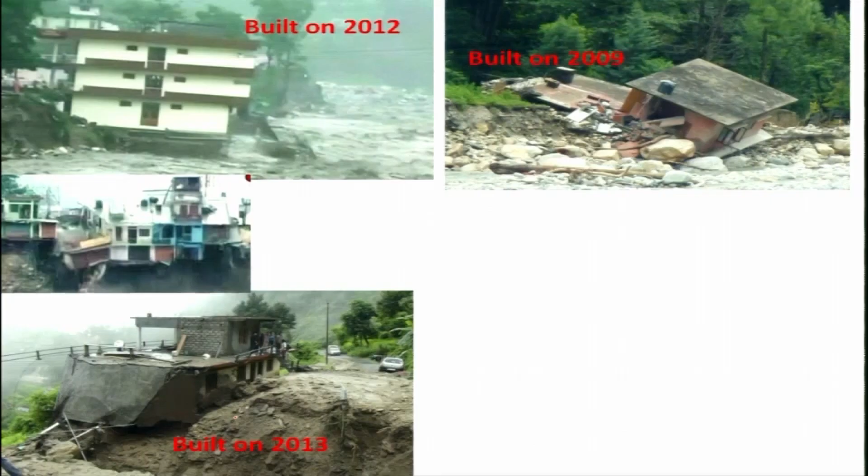This is quite an old temple, and let me tell you that it has survived over the years, and in recent time there was a flash flood in 2013. If you look at the buildings which were built around this Kedarnath town, this building was built around 2012. This building which was spoiled by the flash flood was built in 2009, this building damaged during the flash flood was built in 2013 itself, and this building was built in 2012.

Now the question arises, what happened to the Kedarnath temple, which was built around 1200 years back according to history? That was a very gigantic flash flood, which destroyed all these buildings. But what happened to the temple? Before the disaster, this is the temple, right? And these are the buildings which were built very recently.

This is before the disaster. After the disaster, only the temple remains, and most of the buildings are destroyed. Nothing really happened to this temple, although the temple was closed for a year to check whether anything had happened to its foundation. Both IIT Madras and the Archaeological Survey of India found that nothing had happened to the temple, whereas the buildings constructed using modern technology were washed away.

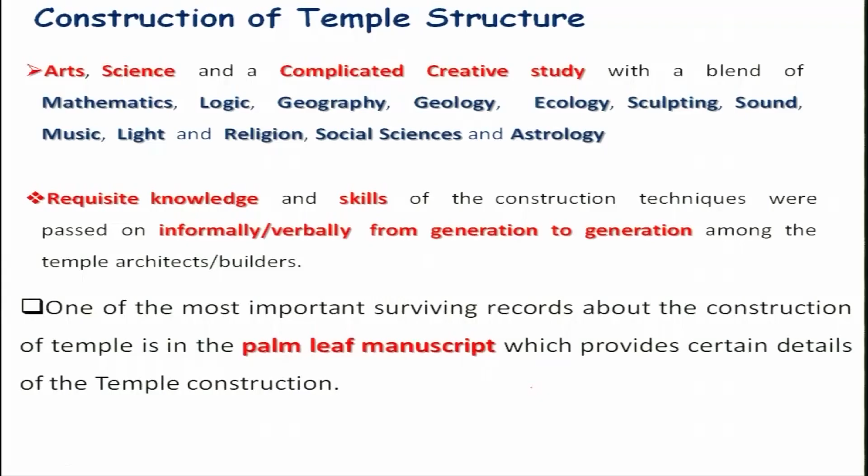However, there is evidence of the temple drawings and some calculations, which I will show you briefly. You can find evidence in certain details about the temple construction. Let us look at this palm leaf, which shows some calculations in the language of that time.

And if you look at the way we do drawing today, like elevation, plan view, and side view, it was there at that time, but unfortunately that is not being taught to our people, even in engineering. This record, which I could get from the work of Michell, who published a book in 1988, shows the list of workmen, their salaries, rules of conduct, and provides an account of several years of various temple building operations.

Of course, this leaflet was obtained from the 17th century; the 12th century documents could not be traced, because of so many years of being dependent and ruled by foreigners. A lot of things were destroyed. And this is a palm leaf inscription from a manuscript showing architectural calculation on a proportional section with height and mandala.

Let me show you a temple. This is the elevation of a temple, and this is a plan view, or the mandala. We do use this mandala in pujas, but I did not know that mandala basically means plan view. When I started looking at this maybe 2-3 years back, I learned, oh, mandala means plan view. So that is what is shown here.

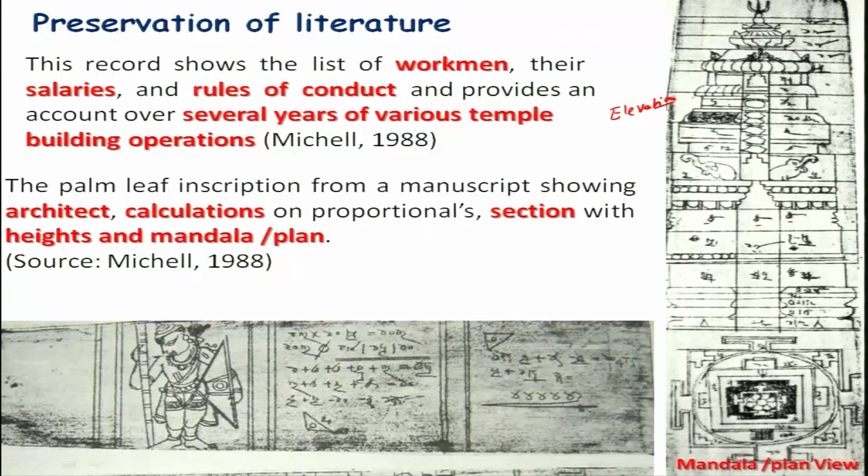Very intricate shapes are drawn on the palm leaves. There are various numbers given, maybe dimensioning and other things, and this palm leaf dates back to the 17th century. That means the engineering drawing we use today was prevalent in our country as we built a lot of temples, but unfortunately it has not been discussed in any engineering book, to the best of my knowledge. So people should feel proud that our ancestors were aware of engineering drawing.

So, let us look at the construction process and the variation and flexibility they had. Temple construction in both southern and northern India, which I discussed earlier, follows a similar procedure, but slight differences occur due to variability of material used, the climate, the availability of human resources, or the social structure of a particular period. There is a lot of variation in architectures.

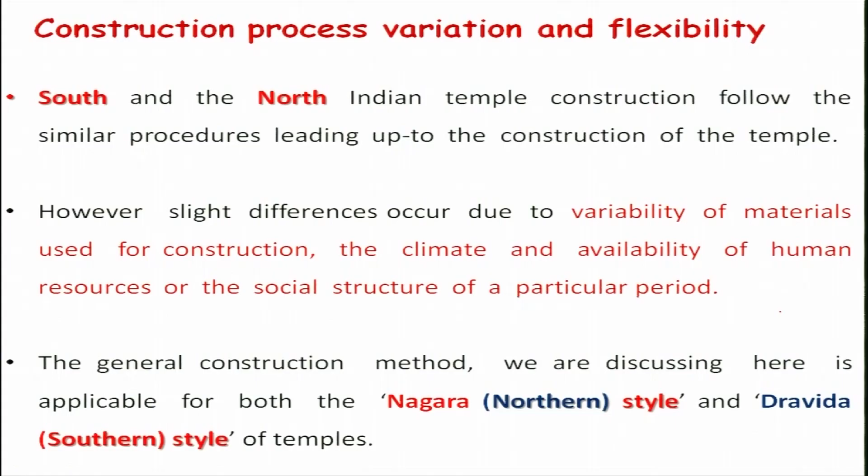I discussed earlier the Nagara style, the Dravida style, and the Kalinga style of temple architecture. Those are different, but the temple construction will be similar. What I am discussing here is the general type, which is common to both.

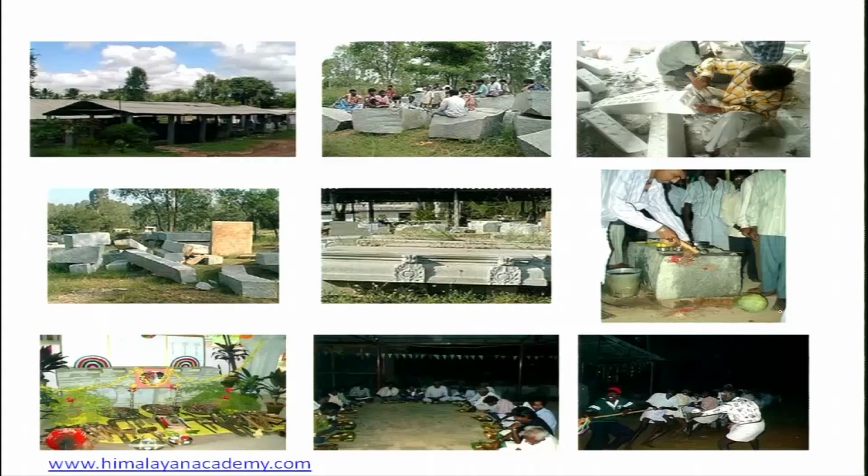Let us look at some of the processes done in recent times for developing temples using stone. This is a place where the stone is kept, and these people are craftsmen, and they perform a lot of rituals before starting. These are the rituals being performed, and generally we revere the tools which are important for carrying out the construction work of the temple or any other construction.

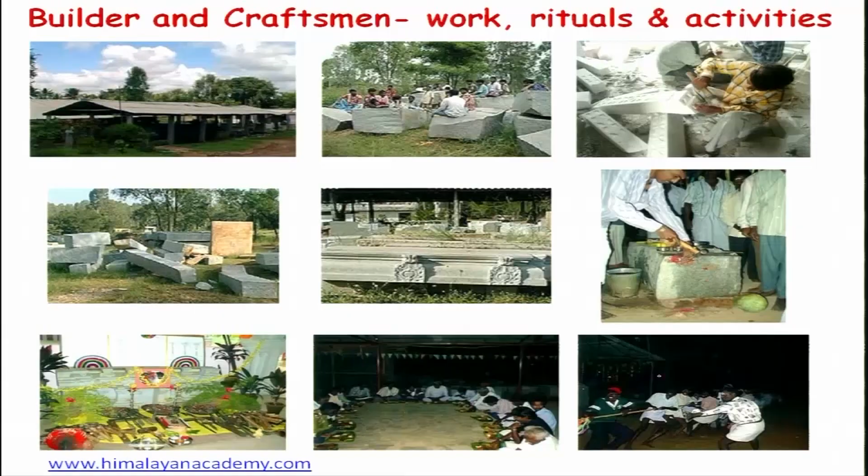And they take food together and they work together, as a group. In earlier days, people worked in groups, unlike today, when people are more individual. There was also the craftsman guild; the groups were like a corporate body of modern days, combining both families and individual workers.

And that is the beauty of it. We always thought of a group in terms of family relationships, which is very emotional and a very strong bond. That was part of our Indian culture, but today it is lacking.

We are more mechanical in nature, and the association had fixed rules of work, salaries, completion time of the work and prices. There were a lot of rules and regulations to have good control over the people. They followed their own judicial privileges, controlling the social life of members, and could expel a disobedient member after discussing with them.

The members traveled from one region to another to work on different projects, spreading the artistic and architectural tradition throughout the history of temple construction, and there is a lot of evidence for this. During the rainy season, generally they took leave from temple building work and went back to their own native place.

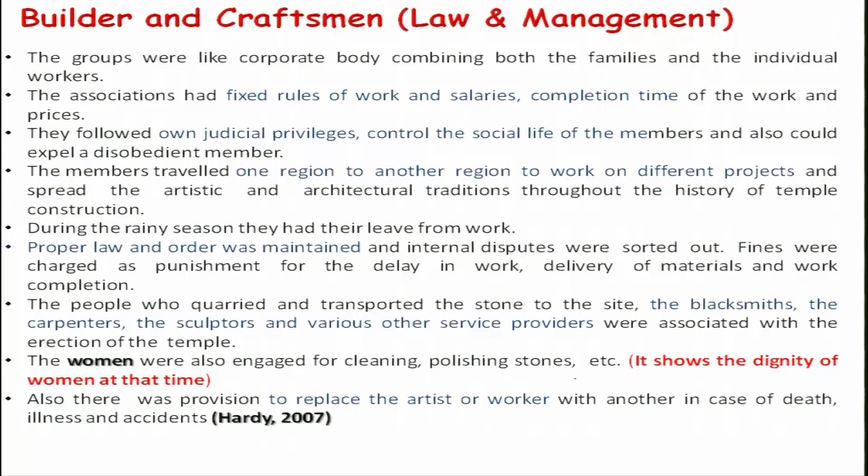As I told, there was a guild or association meant to take care of the people by providing training to young persons and students - not in a separate school the way we do in modern days. For example, in engineering colleges we train engineers but without giving much exposure to the practical aspect of engineering.

Rather, they were giving training to the young generation on the project site itself, where work was executed under the supervision of experienced, skilled persons. They might also give theoretical knowledge of geometry, history, measurements and drawings. Besides this, they were also teaching knowledge of music, dance and yoga, as these are part and parcel of the Hindu temple in earlier days.

That has to be looked at as part and parcel of the sculptures, which would then be written down or placed on the walls or roofs of the temples. Generally, the training time spanned almost 10 years, and once they had acquired enough knowledge, they were asked to go find work on bigger or prestigious projects so they could establish themselves.

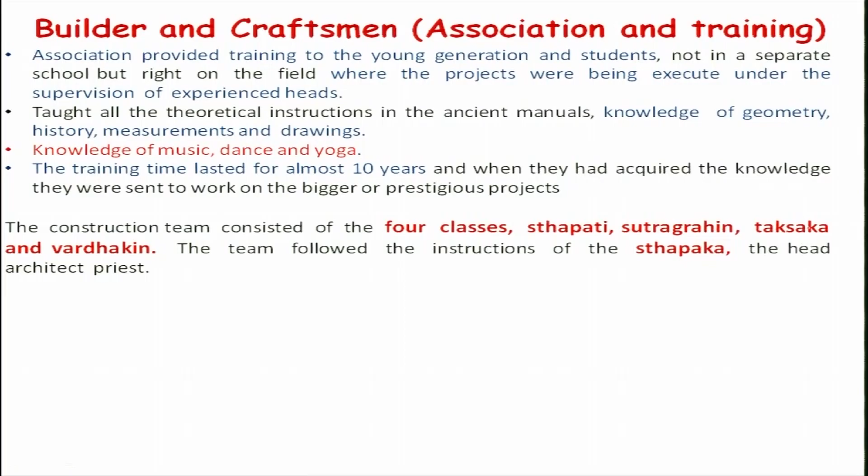There is a hierarchical system at the time for temple construction, and selection of the team is generally done firstly by selecting the main architect, the Sthapati, which might be chosen by the Sthapaka and also the person sponsoring this project. The Sthapati is generally appointed by the king or the minister.

The Sthapati should have complete knowledge of Shilpshastras, the traditional sciences and mathematics, and Puranas, which according to us is a historical book of our civilization, as well as paintings, music and yoga.

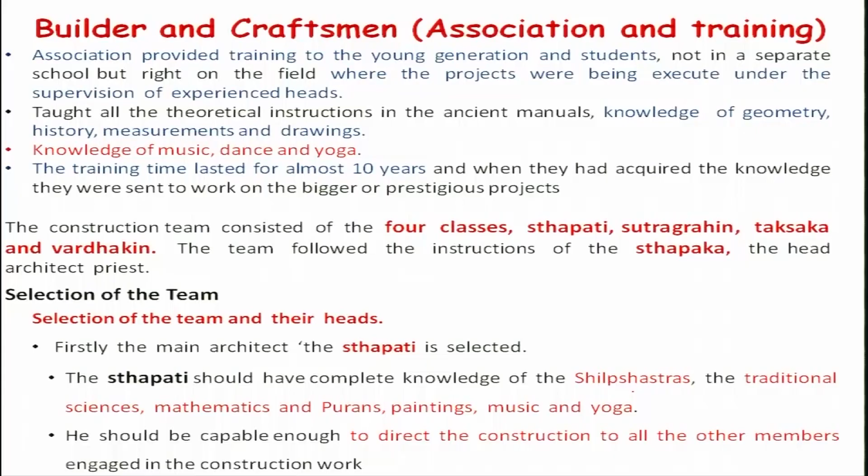He should be capable enough to direct the construction work to all the other members engaged in the construction, because he should have command not only over the knowledge, but also know how to manage the people and give proper instruction at the proper time. So managerial skill is a must for the Sthapati, and he must have overall knowledge of the entire construction work of the temple.

The Sthapati should be kind, joyous and free from hatred and jealousy, truthful with control over senses, focused in mind, also free from greed, carelessness and disease. These are the qualities considered for selecting a Sthapati, because he is basically the head of all skilled people.

And Sthapaka is also selected by the patron, generally the king or the minister of a particular kingdom, or a rich person who will be sponsoring this kind of temple construction activities.

He should also be well versed with the Shilpshastra and perform the architectural rites correctly, because at that time the rites were to be performed properly, and that was very important before making a temple.

Sthapati and Sthapaka have to work together, and the construction started by the two should be continued by them only, unless under some special condition when they are not available at the work place, due to some disease or due to some urgent requirement. In that case, that power should be delegated to an equivalent person who must be a disciple faithful to them. So that is the kind of thing that was really being followed at that time.

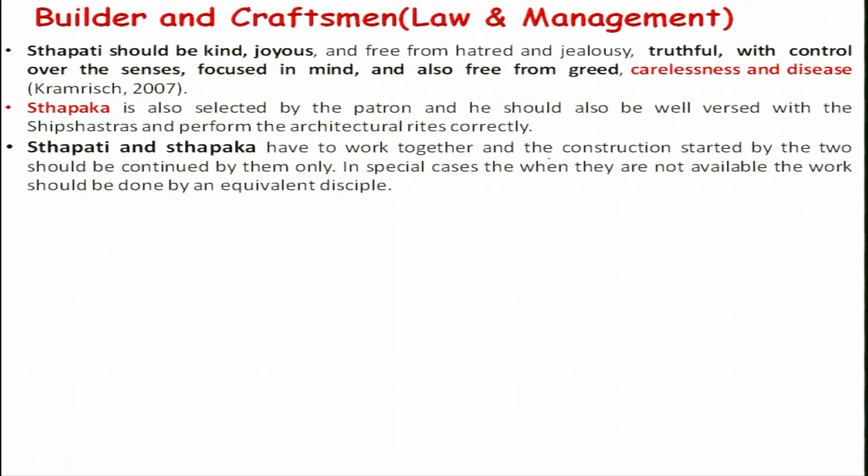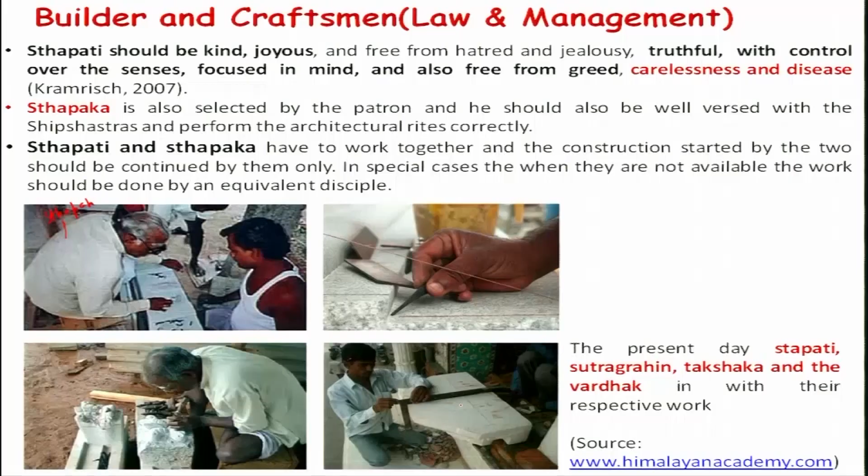I am just showing some figures here - the Sthapati who is looking after all the work, and this person is basically Sutragrahin, who is doing this kind of drawing and then drawing the lines, and Taksaka, who is taking care of sculpting, and then Vardhakin, the carpenter, who will be looking at the dimensioning and their respective work.

Generally the Sutragrahin is the disciple or the son of Sthapati - that is, family also comes into picture - whose role is to perform all the work assigned by the Sthapati.

So if you look at the main executive, it is the Sutragrahin, who will be following the instructions given by Sthapati, and also he should have knowledge of layout and proportionate measurements like vertical, horizontal, by chord and rod. These were the two tools being used at that time.

And the Taksaka is the cutter of the stone and other materials, who cuts and carves the large pieces, and does the subtle detail work, and should be able to work on his own initiative, also following the instruction given by the Sthapati. He is the head of the stone cutters, who looks after all the things. There might be several people under him cutting the stones and doing various other works.

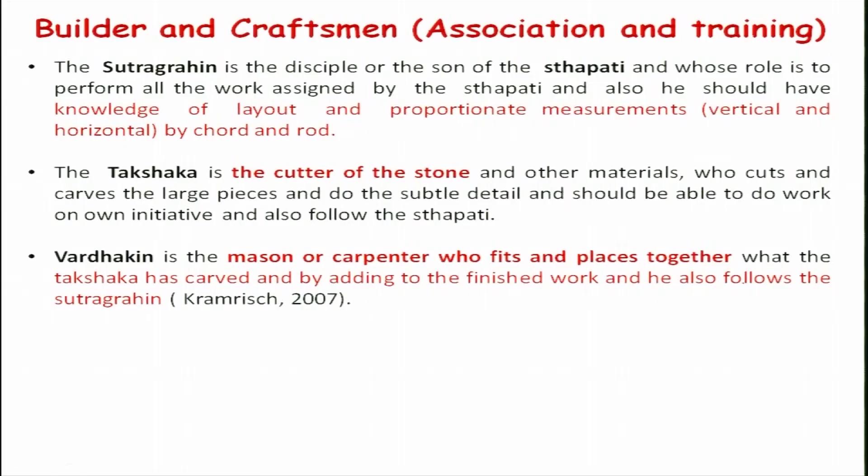The Vardhakin is the mason or carpenter who fits and places together the stone that the Taksaka has carved, adding to the finished work. He also follows the instruction of Sutragrahin. There is a proper order, a flow of order given, and that has to be followed.

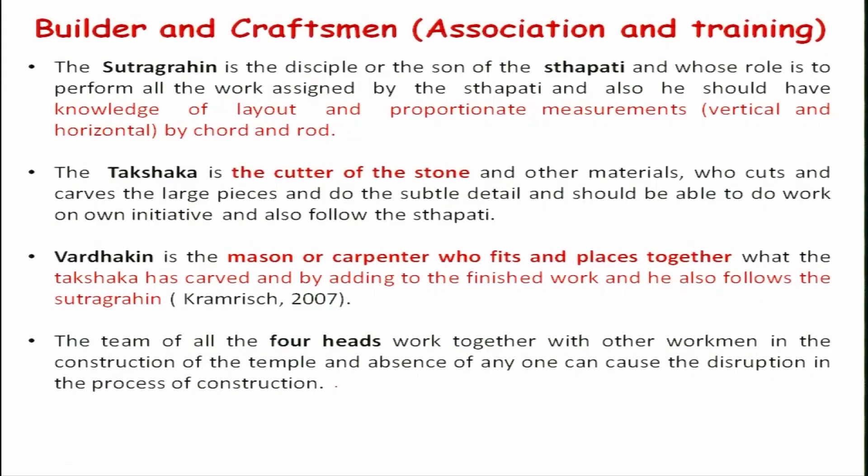So the team of all four heads - Sthapati, Sutragrahin, Taksaka and Vardhakin - work together with other workmen in the construction of the temple, and the absence of even one can cause disruption in the process of construction. So therefore, they always have to be there and take charge.

And let us now look at the stages of construction. Generally, the construction of a temple lasts for decades, in 3 stages.

The first stage is planning of the temple. The selection and examination of the site is a very important aspect, and then later on layouts and measurements are to be carried out, and the selection of materials, particularly stones and other materials related to construction, are to be considered. Then quarrying of various kinds of stone used in earlier days has to be looked at, which stones to be used at what places, and the orientation of the temple, list of parts and components of the temple, and allocation of work - that is very important. You will have to allocate the various works to different kinds of people, and the layout of the temple on the site has to be carried out in the first phase.

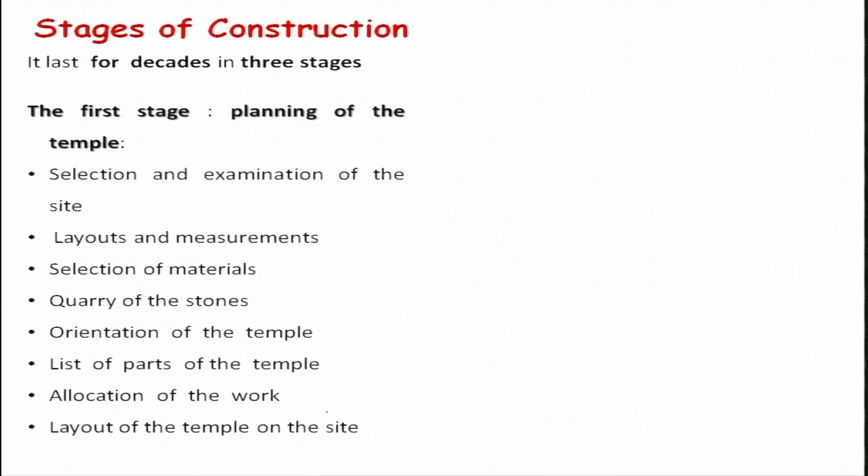The second stage is the carving of different parts of the temple structures. Of course before that you will have to do the drawing and detail, the way we do it in present day - they might have had all the calculations and drawings fixed before this.

And carving and cutting of the stones was one of the very important works in the second stage, along with construction with brick, stone or timber. The Taksaka instructed the sculptors and silpis to carve out various parts according to the drawing specification guidelines given to them.

The third stage is basically assembling parts of the temple. The actual construction of the temple starts from this stage; all other things before this are preparations.

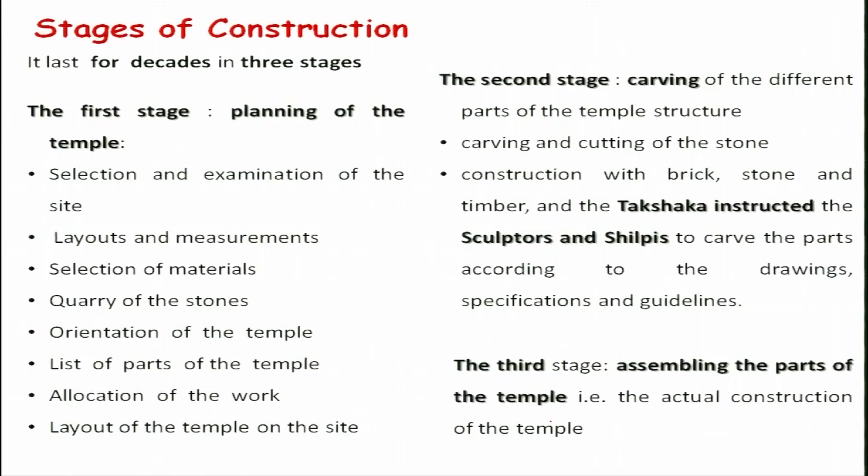Let us look at stage 1: site selection and preparation for construction. The selection of the site is very important because the load of a temple is quite high, unlike modern buildings. So the site has to be selected properly so it won't slump down due to the piling of stones of heavy weight, sometimes lakhs of tons of stones placed in one place.

Leveling of the site was done in a very considerable, systematic way, with different layers. They would allow an elephant to move over it and also give some water, then let it settle down for a few years, not just one day, so that the ground would be steady enough to take the load of the temple.

Next comes orientation, measurements and layout. The selection of material is also very important, because there are so many stones, and you have to quarry the stone from a shorter distance so transportation won't be a problem. How to carry these heavy stones from the quarrying site to the construction site is a very important aspect. Carvings on the temple were very tedious work, and whether the chosen stones could be carved out or not was another question.

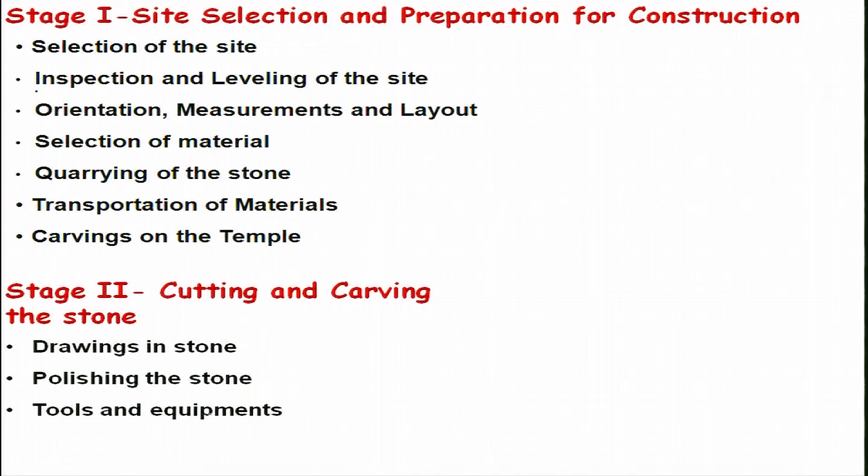The cutting and carving of stone, drawing on the stone itself, and polishing of the stones required tools and equipment to be fabricated, and one had to decide what kind of tools to use and how to take care of them.

Stage 3 is the process of temple building: laying the foundation, which is very tedious work and has to be done properly. Then assembling of elements, where joining and numbering of each part is very important, along with the joinery system and what kind of joints will be used. Then there is the plinth, which needs careful attention, the walls and what style to use, and the columns and beams, including their diameter, length, and various parts.

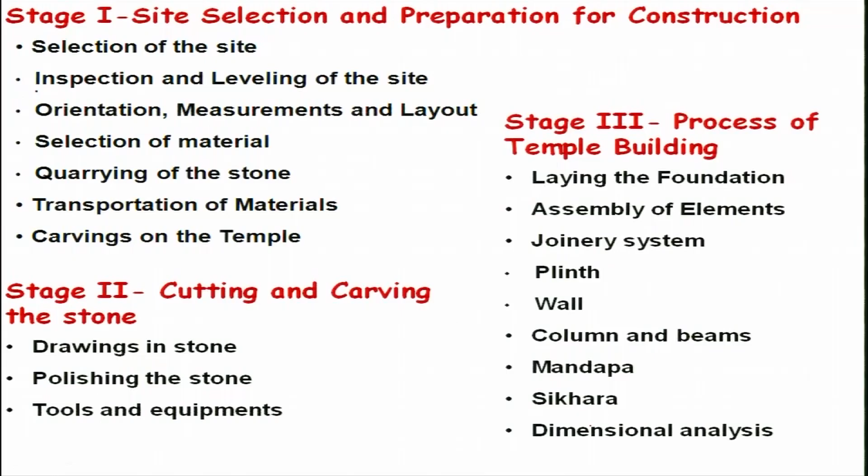The mandapas and sikhara are a very important aspect, because load distribution is basically controlled by the sikhara, or the amalaka on top of the sikhara. Then there is dimensional analysis which builders might have done. In earlier days, people made a prototype first, learning from it before building, the way we do in modern times.

Let us look at orientation and layout as per the Vastu Shastras. The Ratha is a facet or vertical offset projection on the plan of the sanctum, as I mentioned earlier. It is generally carried from the bottom of the temple structure up to the superstructure of the main sanctum, and depending on the number of projections, the Ratha can be classified.

Eka Ratha means one Ratha; Tri Ratha has one projection on each side; Pancha Ratha has two projections on each side; Sapta Ratha corresponds to three projections on each side; and Nava Ratha has four projections on each side, as I had discussed.

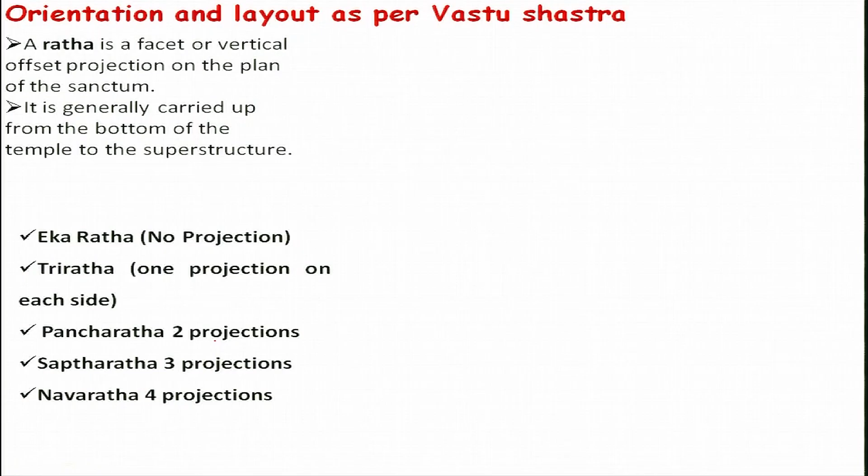In the Eka Ratha, there is no projection; it is just a square. If you start with a square, it will look like that.

In the Tri Ratha, there is one projection outside—on one side, and another on the other side, which is the projection. This is the first projection, the second projection, and that is the third projection. So basically, three projections are made on each side.

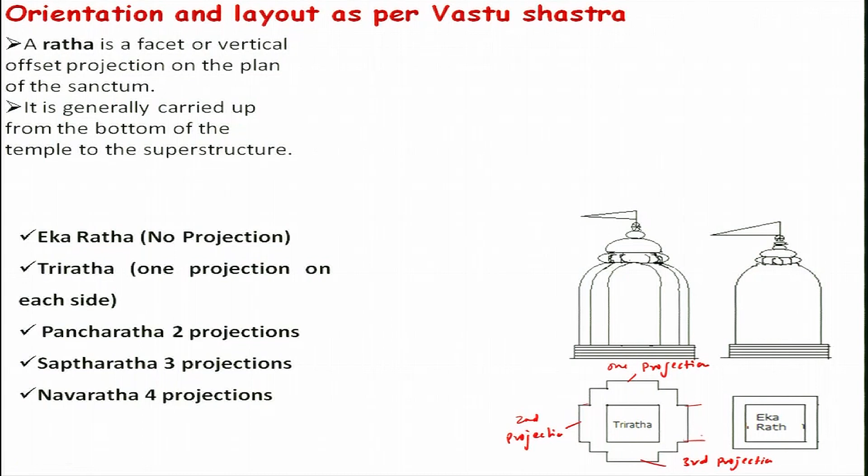On the other side, generally, this is the entrance to the temple, the Garbhagriha. Similarly, the Pancharatha has two projections on each side. In the Triratha, as mentioned, these are the projections: 1, 2, 3, and also 3 on this side. Whereas in the Pancharatha, you can count 1, 2, 3, 4, 5.

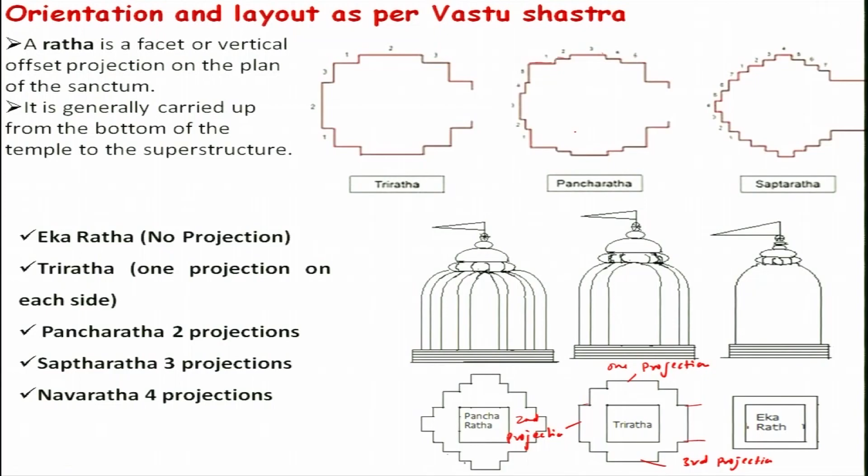So, similarly, it is also 5 steps, and in the Saptaratha there will be 7 steps on each side, and therefore that has to be decided, like which one you want to have, and then of course that depends on your height and on several factors, and also the shape, what it looks to be, and the load it will be taking. So,

quarrying of the stone, if you look at using the wooden wedges. Generally the question arises how they were really cutting the stone from the mountain. That was a very big question, because the tools available were not good enough to really cut the stone, which is very hard, particularly granites and sandstones and other things.

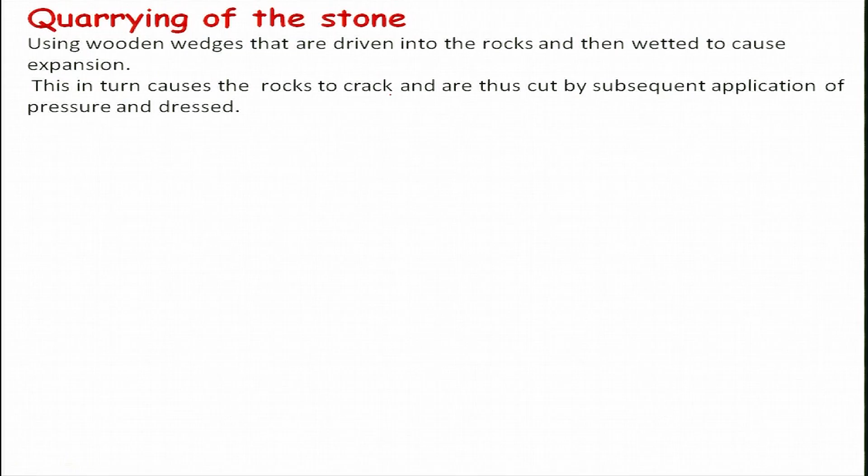What people are saying is they used wooden or metal wedges that were driven into the rocks and then wetted to cause expansion, and this in turn causes the rocks to crack, but crack in a very controlled manner, which is very important, and then they can be cut by application of pressure, and then that can be dressed so that it can be used.

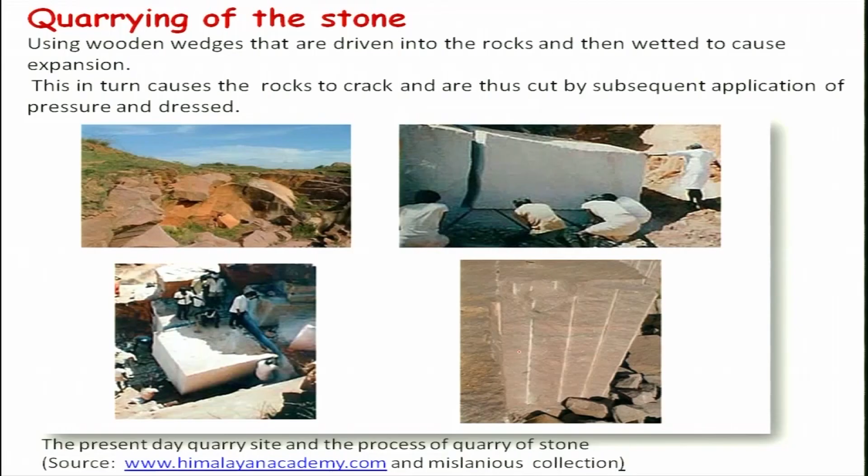So, if you look at these pictures shown, these are the mountains, and one has to cut from this, and people are also lifting the stones with the help of a shaft and rolling over it, and it's a very tedious task and also quite risky. So, these are the pictures shown here, a present-day quarry site and the process of quarrying the stones.

And so, let us look at how people might have cut the granite from the monolith in the mountain itself. A series of holes is drilled along the line to be split using a chisel. For example, there will be various chisels here, these are chisels, right, and they will be in series along this line. First you draw the line and then put these chisels and hammer them, and generally 3 men hit the iron chisel in turns with sledgehammers sequentially, and of course, more people can join.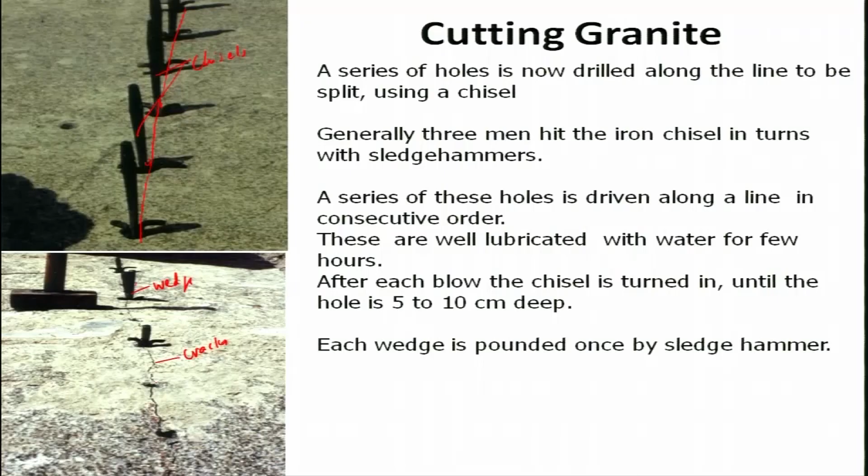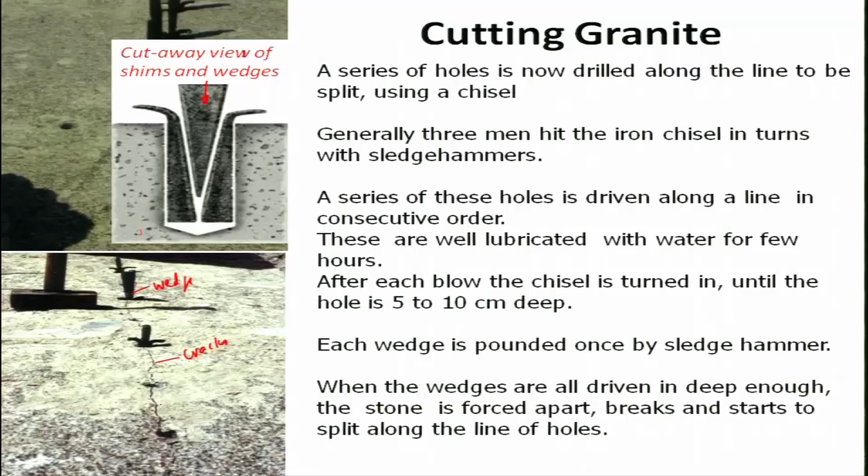So if you look at the cutaway view, the wedge is shown here with the shims, and if you give pressure here, you will try to spread it, expand the stone, such that the crack will occur. So, when the wedges are all driven in deep enough, the stone is forced apart and starts to split along the line of holes, and by that they could manage it. Of course, there are several ways of doing it. I have just shown one of them, which is considered correct according to researchers.

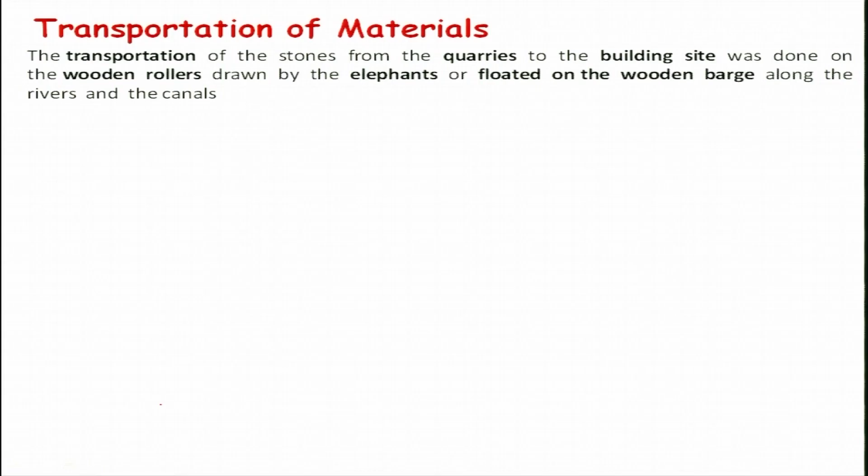So, transportation of material was a very big issue. Think of such a big stone, yet they could manage to transport it. Of course, modern-day cranes and other facilities were not there. The transportation of the stones from quarries to the building site was done on wooden rollers. As I have told, these are wooden rollers, and these stones were drawn by elephants, or maybe floated on wooden barges along the rivers and canals. These are all speculation. I think they might have done these things.

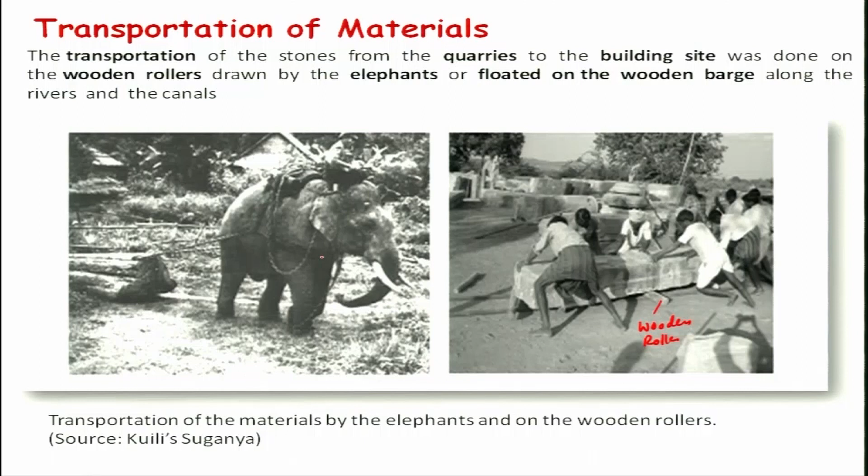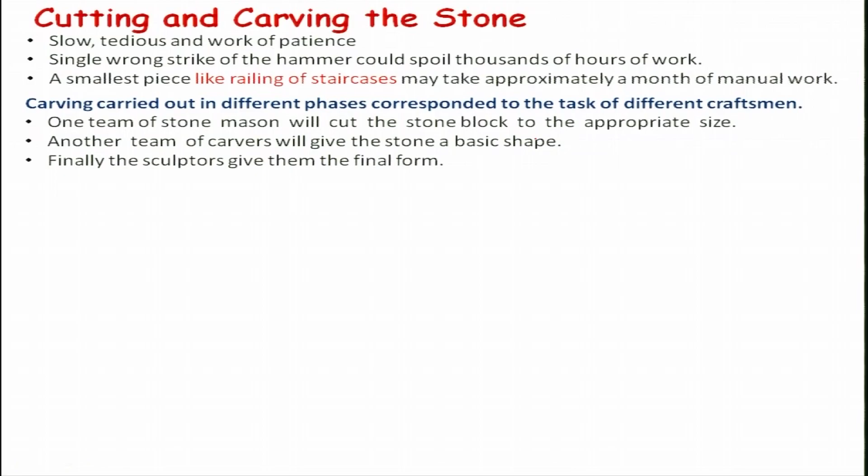Another team of carvers will give the stone a basic shape, whatever is required. Then finally the sculptors give them a final form. Different kinds of skilled people will be used in phases so that things will be done, and they will do only that work. So, let us look at how it is being done in modern times.

And the joining system of each stone is pre-decided. See, that is very important, how they were doing that at that time. Today, in spite of our very good technologies and marking processes, we still have a lot of problems when we are assembling the various components. And rough joinery details are prepared simultaneously.

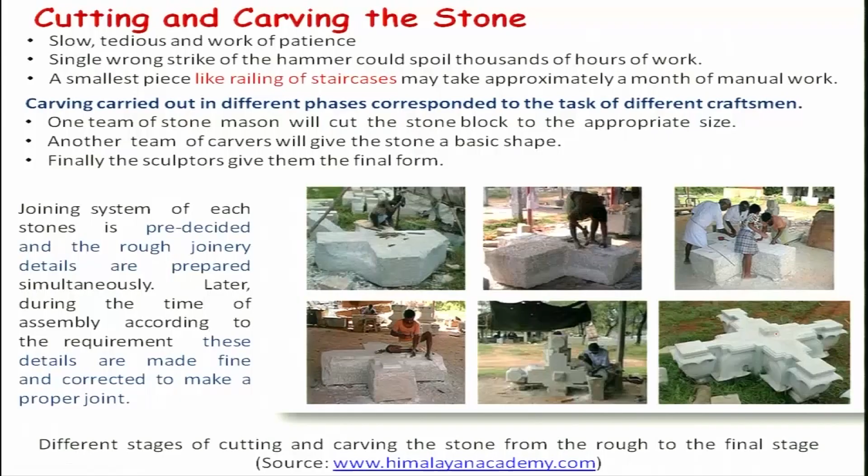Of course, this is the procedure people are describing; we are just thinking they might have done it earlier. Later, during the time of assembly, according to requirement, the details are refined and corrected to make proper joints. If you look at this, this is also one shape, and on top of it another similar structure will be put, which may be a pillar. So this is basically the mortise and tenon joint, and the mortise and tenon part is here.

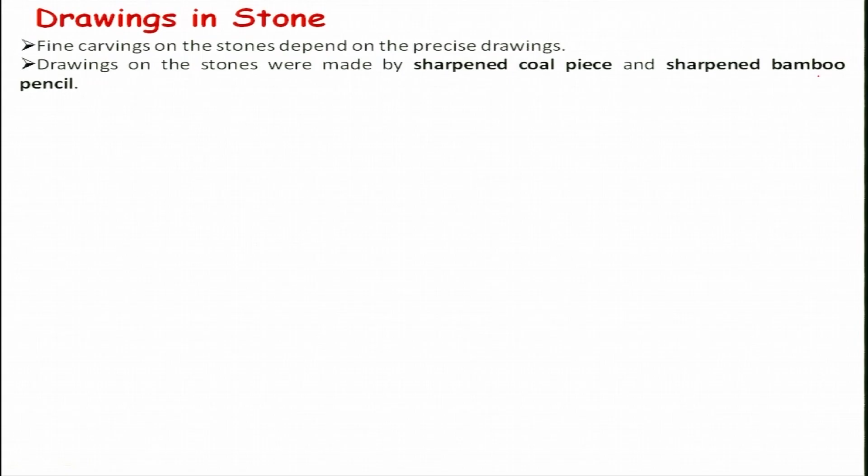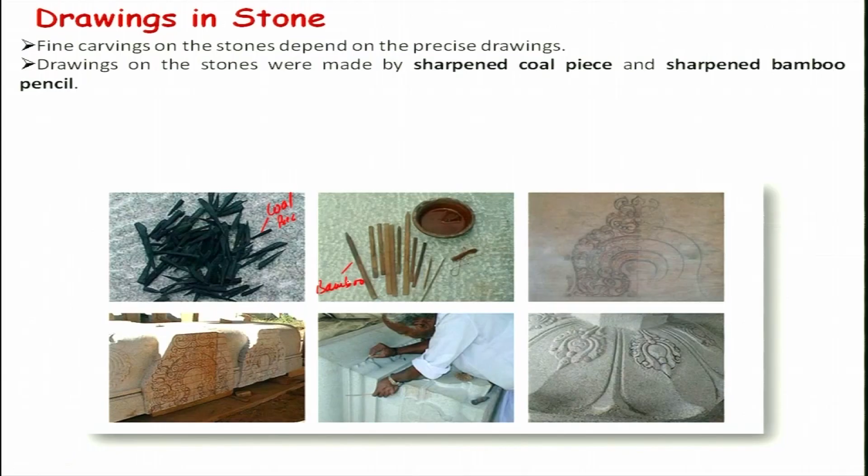First you will have to do a drawing in the sketch, and then these bamboo pencils are dipped in coloring agents such as lime, ink or red oxide for marking on the sketches, like it is being done here, marking on stones.

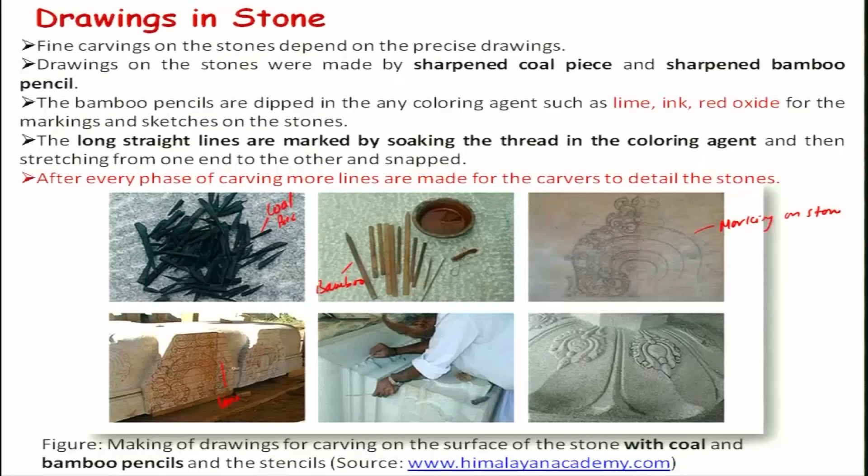And then the long straight lines are marked by soaking a thread in coloring agents, stretching it from one end to another and then snapping it. That way it is also practiced. For example, these lines have to be done in this process, and after that you use the tools for carving very patiently, and after every phase of carving more lines are made for the carvers to detail the stones. That means it goes in a sequential manner, so that no mistake is made.

So carving of stone, as I have shown here, is so intricate, a very difficult and very painstaking job. The carving begins with chiseling away large chunks of redundant rock, which is known as knocking off, and this is carried out using a pointed chisel and a wedge-shaped pitching chisel, with a mason's driving hammer, and markings as per the drawing are made on the stone with charcoal and sharp bamboo pencils, as I mentioned earlier.

Several types of specific chisels and hammers are used to create a final figure. Some of them I have shown here, like tooth claws, and then a flat one. This is the flat, and then bull nose chisels, and then pointed. Several kinds of chisels can be made according to requirement. They were designing their own chisels and using them.

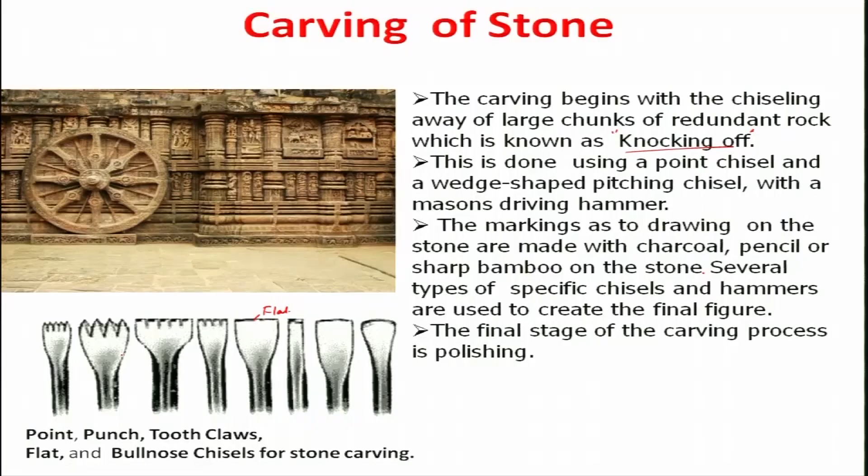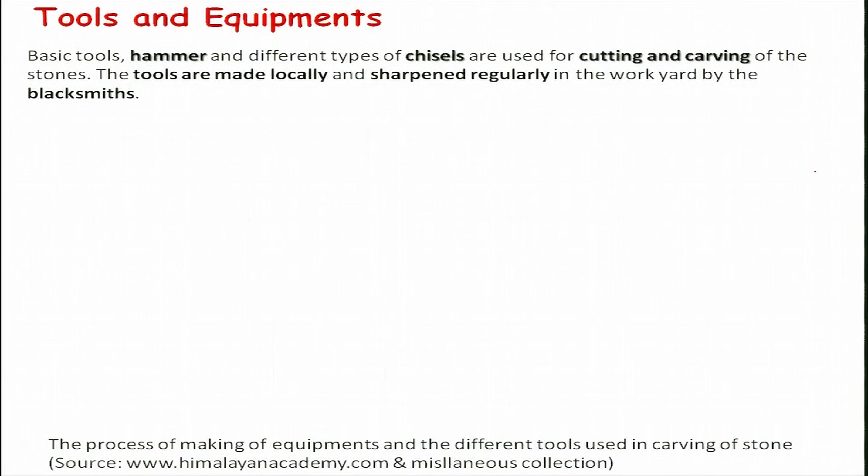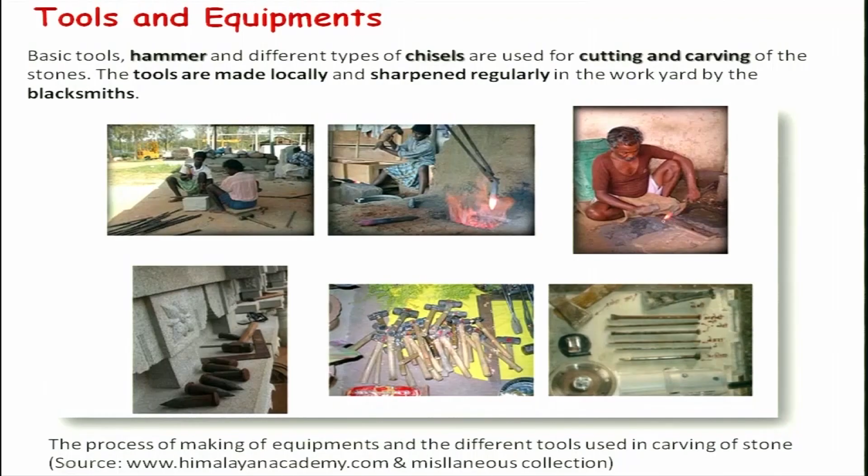Basic tools like various kinds of hammers and chisels are used for cutting and carving the stones, and the tools were made locally in ancient times and sharpened regularly in the workyard by blacksmiths, and according to their need they were designing the tools, unlike in modern days, when tools are available in the market. Even today, those people working on stone temples develop their own tools and use them.

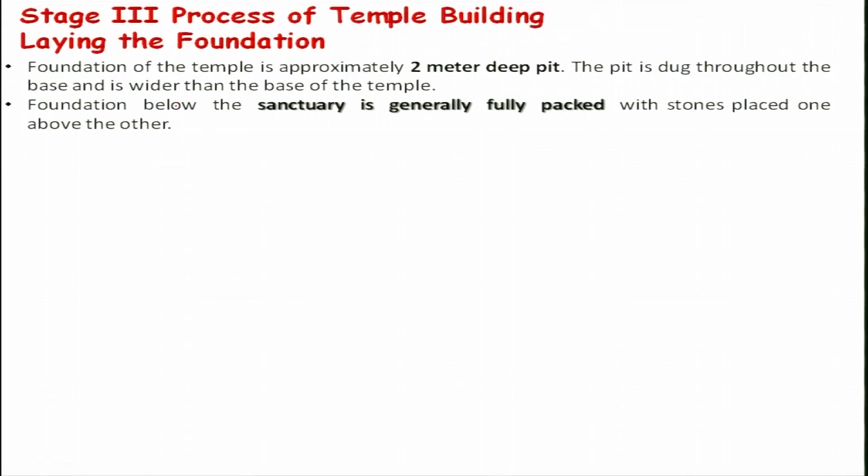Stage 3 is the foundation: the temple foundation is an approximately 2-meter deep pit, dug throughout. The base is wider than the base of the temple, and the foundation below the sanctuary is generally fully packed with stones, placed one above the other.

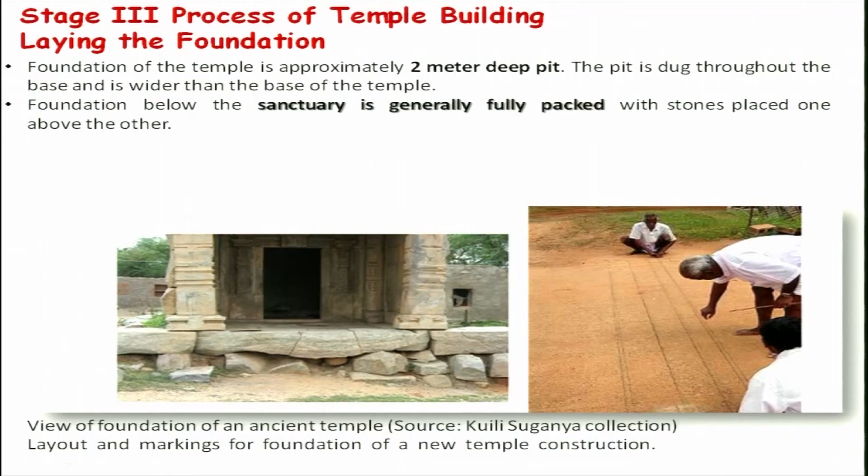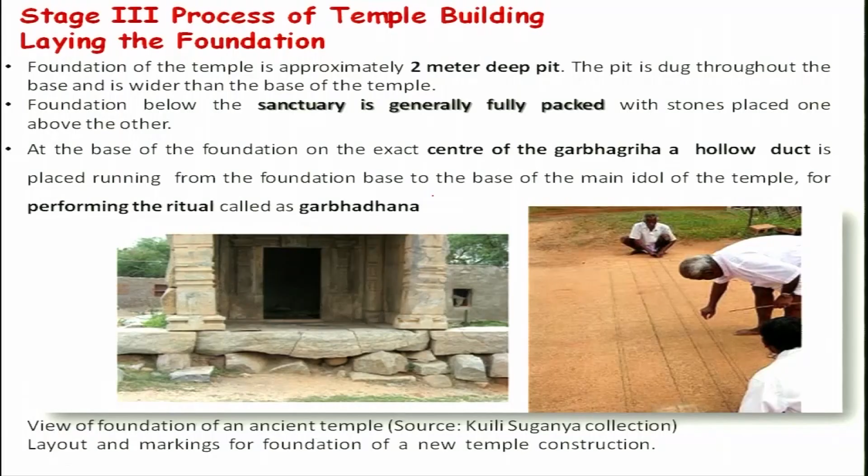And at the base of the foundation, on the exact center of the garbhagriha, a hollow duct is placed running from the foundation base to the base of the main idol of the temple for performing rituals called Garbhadhana, because this is a very important part which is being done during the construction of the temple or during the laying of foundation of the temple construction.

So, therefore, another thing is the assembly of elements, the final and the most important stage. After carving of the individual pieces is completed, different levels of temples with its different parts are pre-assembled to check the accuracy of joints and avoid any misfit during the time of placing the part at its actual position in the temple. See, this is a really tedious task, and how they were managing without error is a big question which is coming in my mind.

And so this is the figure of how they are doing it in modern days. They are being numbered properly. These numbers are given here, and they will be placing them with each other so that they can assemble it. But at that time, how they were doing it, they would basically be using some number, but how good it is, where they would be keeping the records and data so that they can retrieve it, because the work was going on for years together.

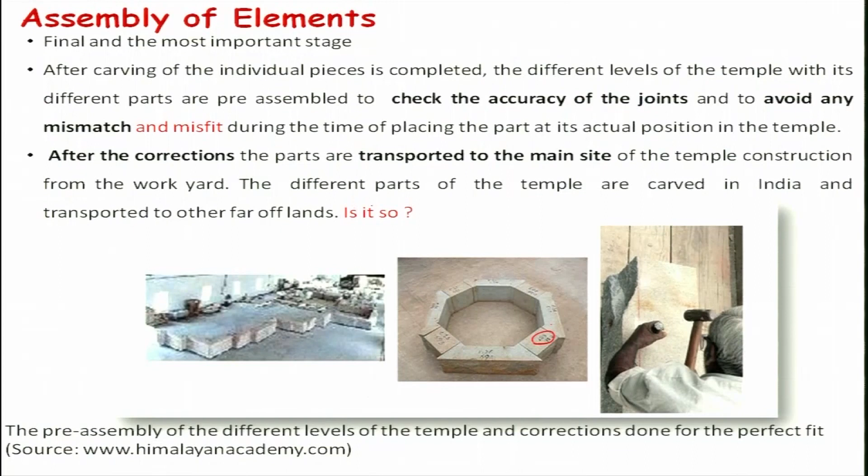After the corrections, the parts are transported to the main site of the temple construction from the workyard. That is being followed today. Maybe it was followed in earlier times, I do not know. The different parts of the temple are carved in India and transported to other far off lands. Whether it is correct or not, really it is a question to be explored further.

And let us see some theories about assembling, how they were doing it. There are various ways people were thinking about, because these are stones of a few tons. So how they were lifting, how they were assembling is really very difficult to imagine at this moment, because of course we can do it today with the help of cranes, but there was no crane at the time. So how they were managing is the question. Some people say the carved parts of the temple were erected into their exact position by rope and pulley on the scaffoldings. That is one theory people have put forward.

Another is that people were using ramps made of timber and sand to ease the placing of heavy members, so that through the ramp they would take the stone and assemble. Even if you take it through the ramps to a very high height, how will we put it there? That is another question.

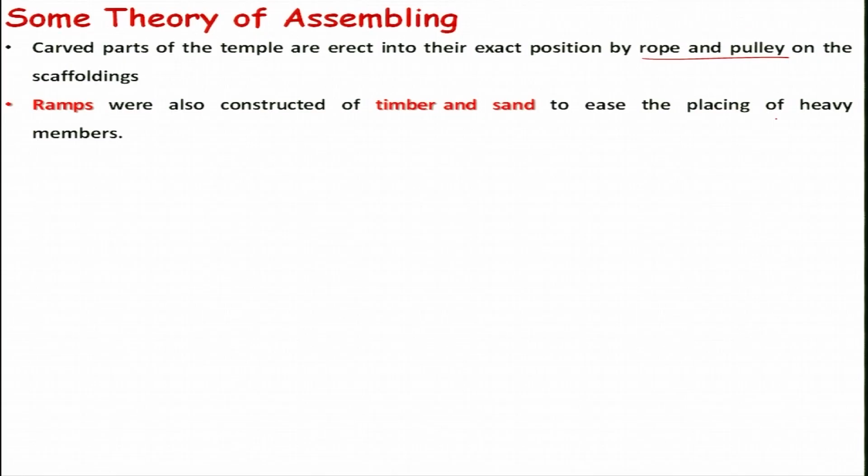The earlier remains of ramps are found near the temple of Brihadeeswara in Tanjore, which we had discussed. Some portion of this ramp is found, which was constructed to carry the 80-ton finial stone to the height of 60 meters, as people are claiming. In present day construction, temple builders use chain and pulley, derrick poles and cranes to place the parts together in the exact position, as I had mentioned earlier.

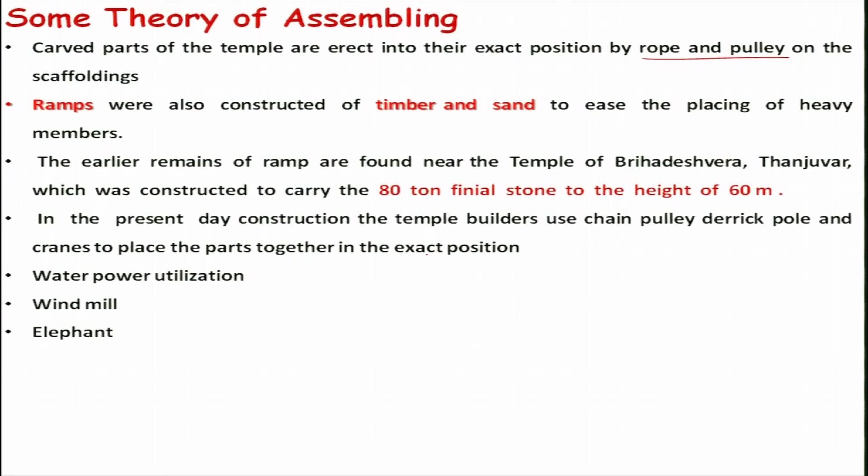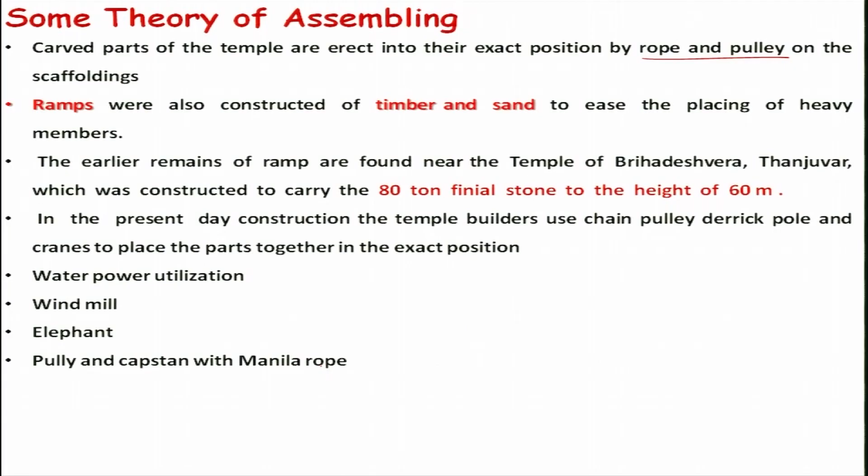And some people have the view that people were using water power to assemble the heavy stones, and some people are proposing a windmill to assemble. Of course, elephants might have been used for lifting the stones and also assembling them, and a pulley and capstan with manila rope might have been used, as people are thinking. But these theories are not really well established, people are just giving ideas and we will have to look at it.

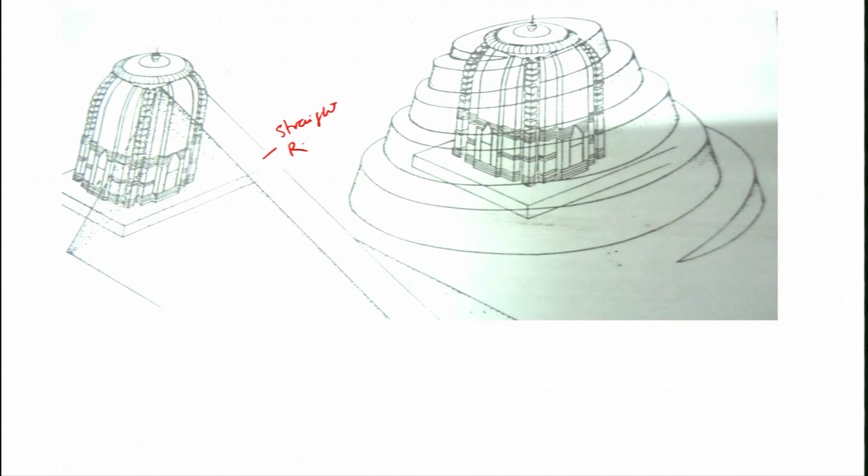Let us now look at how they were assembling the temple, because the height of the temple was quite high, even of the order of 150 to 220 feet. So if you look, two proposals are being talked about here. One is the ramp. This is a straight ramp, and this is a spiral ramp.

And which is right, we do not know, but people are saying that this straight ramp may be the right one. But if you consider that, then for 216 feet, if you take a smaller angle so that the elephants and other people can really move, then an 8-kilometer ramp is required to take the stone to the top of the temple of 216 feet.

And of course, if it is a straight ramp, that means the ramp will be around this temple, and which is really very huge. Now, how much sand is required and all those things, I will show you a little calculation. But again, how you will be placing the stone and in which order is one big question. And even in the spiral one, that angle is also important, and one has to number it properly, otherwise it will be very difficult to really do that.

Because you will have to initially make this ramp and then put these stones, and then make the ramp in a gradual manner whenever you are doing the spiral one. Now even the straight one, how you will do this thing? This ramp has to be done slowly around the temple, or it will be done one way, then finish it, go to another angle and then put the stone. These are all questions for which more research is required.

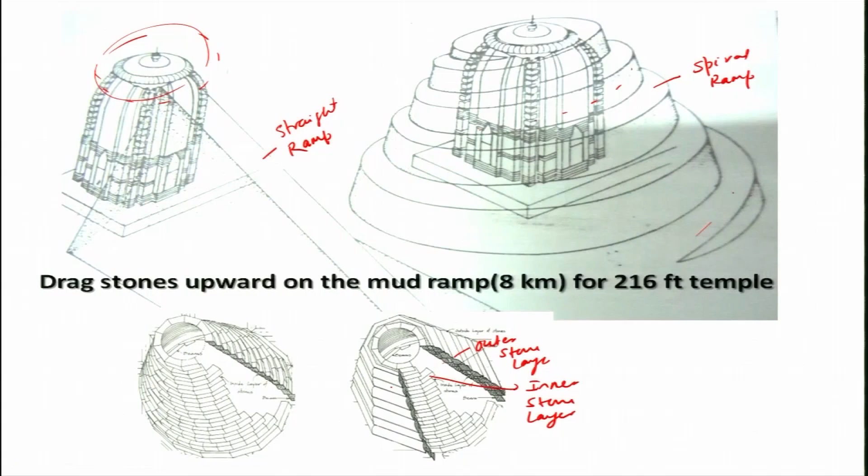And if you look at how the assembly will be done, there is the inner stone, and then there will be the outer stone layer, and this is your inner stone layer. Generally 2 layers are used, and the stone should not fall inside or outside. Those things have to be taken care of. Of course, if it is filled with sand outside, it won't fall there, but inside it can fall. Then how will they take care of that? All these measures must have been properly planned and executed, otherwise this temple building could not have been successful.

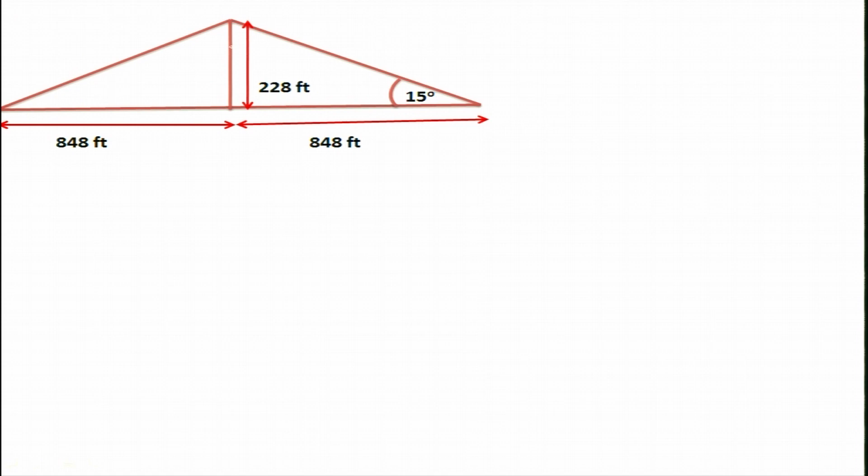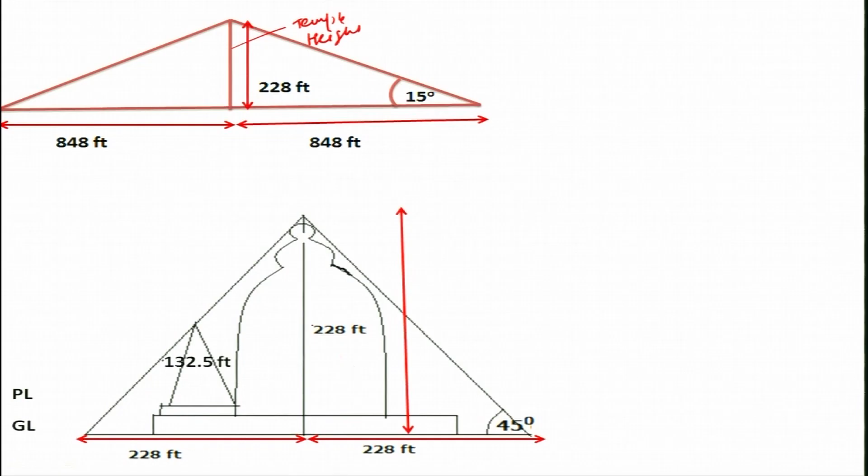Let me just discuss with you. This is the temple height of 228 feet, and having 15 degrees, if you go to the top, then it is something 848 feet. Now, if I am having 45 degrees, which we cannot really use, because 45 degrees is too big an angle to really go up, then you need 228 feet. And even 15 degrees is also too big, but if you go for this, you need land for this kind of temple height of 228 feet.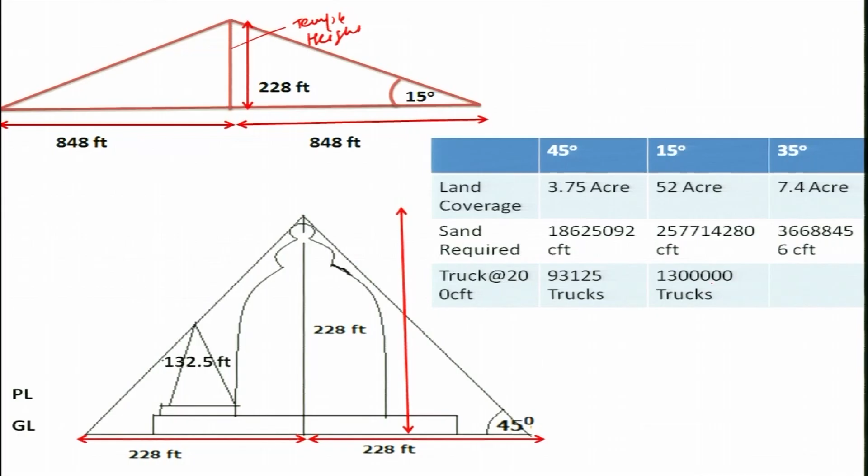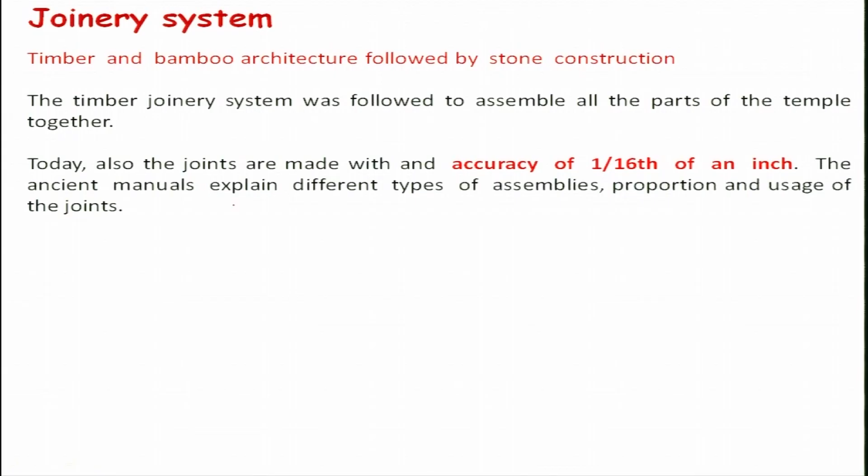Joinery system: as I was mentioning earlier, timber and bamboo architecture was available earlier in India, and stone construction came later on. Maybe the stone construction was done with a similar joinery system as used in timber and bamboo architecture. The timber joinery system was followed to assemble all the parts of the temple together. The joints are made with an accuracy of 1/16 of an inch. The ancient manuals explain different types of assemblies, proportions and usage of these joints.

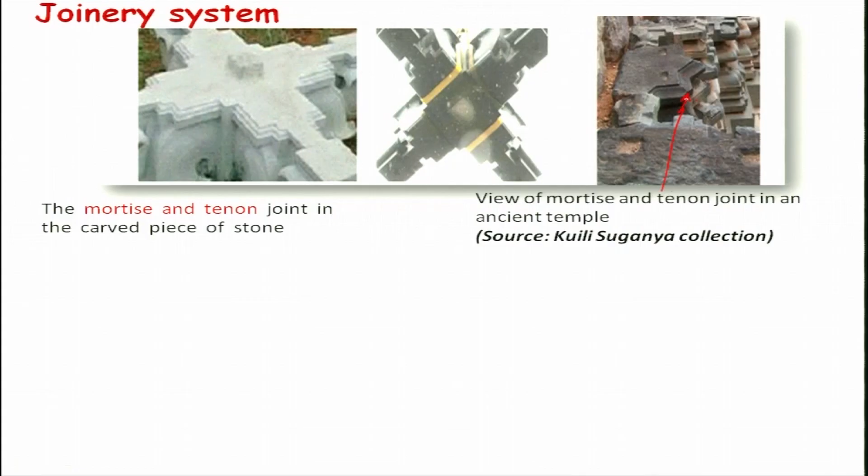And as I had mentioned earlier, the mortise and tenon joints were mostly used for the vertical assembly, and lap joints were used for horizontal assembly. Mortise and tenon joint with a peg is fixed between 2 mortises cut out in 2 different stones, and this joint is usually used between 2 courses of masonry to avoid the movement of stones due to lateral forces. Because of lateral forces, you will have to use this kind of mortise and tenon joint with a peg.

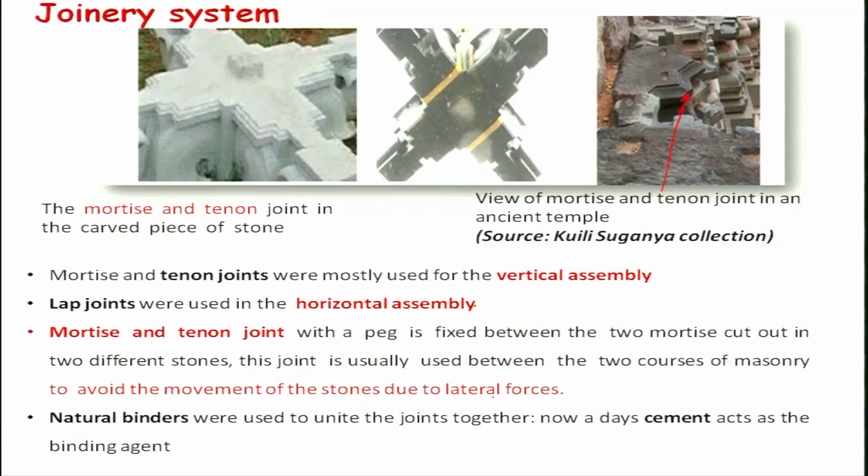And if you look at it, generally most of the temple structures were built with stone without any binders, but in maybe a later stage, in some places, people do use natural binders to unite the joints together. Nowadays, of course, people are using cement, which acts as a binding agent. But in earlier days people were polishing the stone to such an extent, and also using peg mortise and tenon joints, so that they would be joined without any binders.

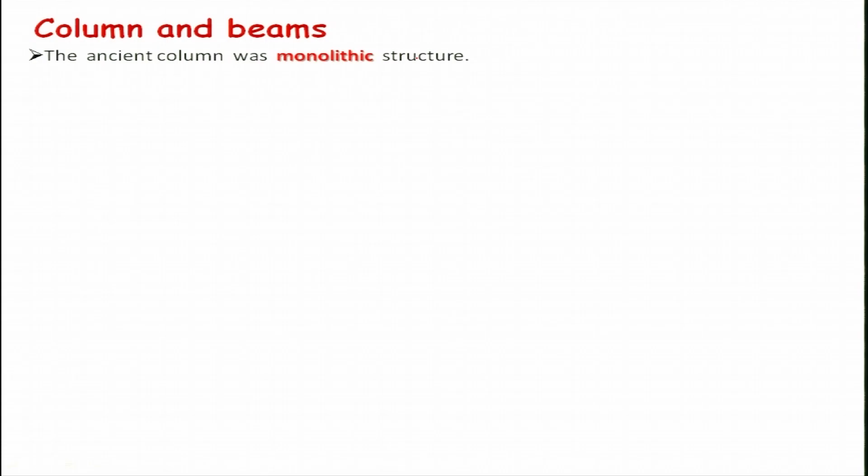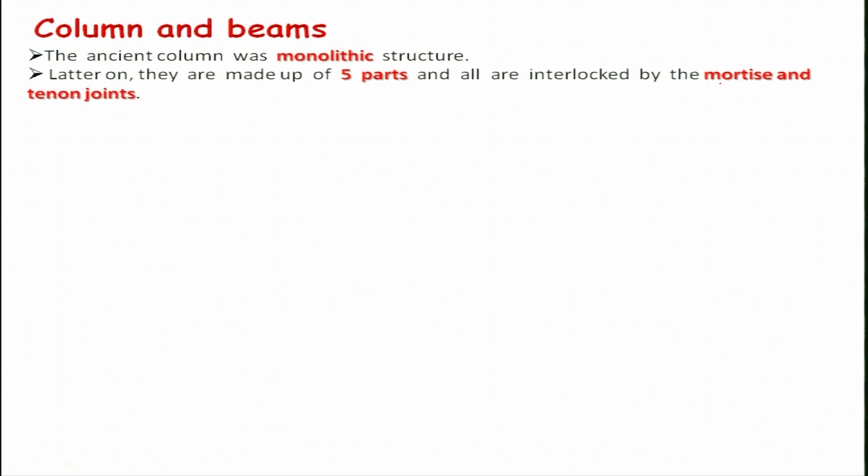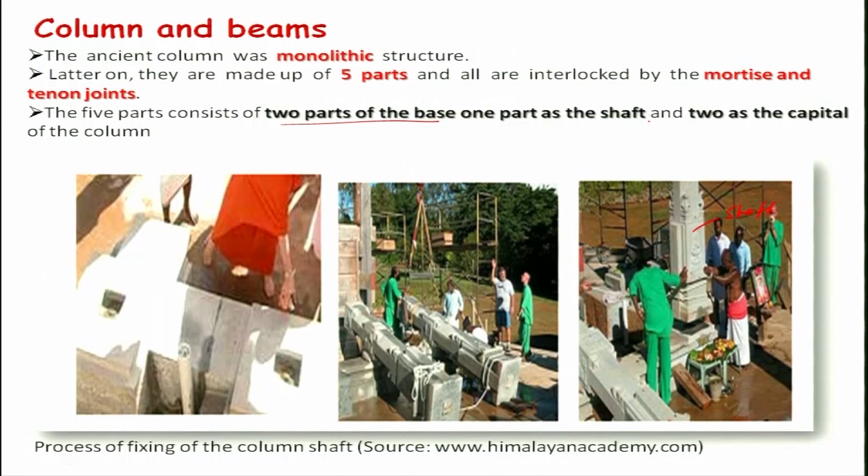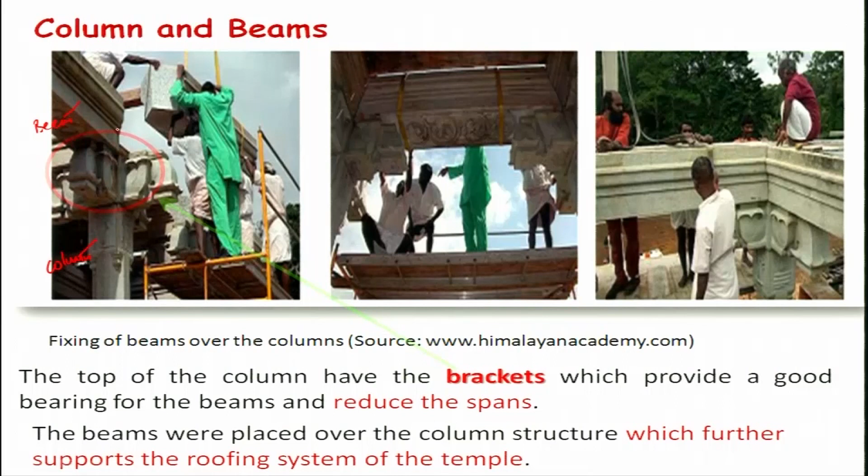So, the things which I have shown here are basically columns, and this is the beam which people are making, and this is the tenon part of the mortise and tenon joint. On the top of it there will be a shaft. So, generally the top of the column has brackets like here, which act like a cantilever. On the top of it generally is the beam; this is your beam and this is the column, and beams are placed over the column structure, which further supports the roofing system of the temple. It is not only nowadays that we are making column and beam structures; in ancient times people were using beams and columns for constructing temples.

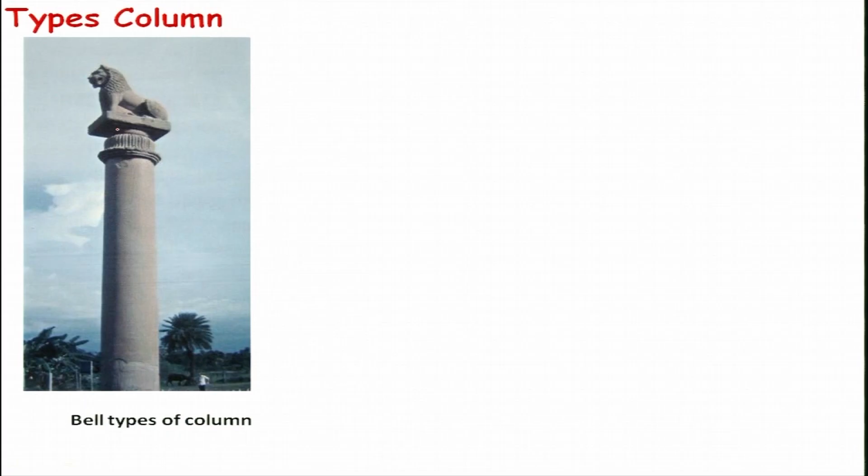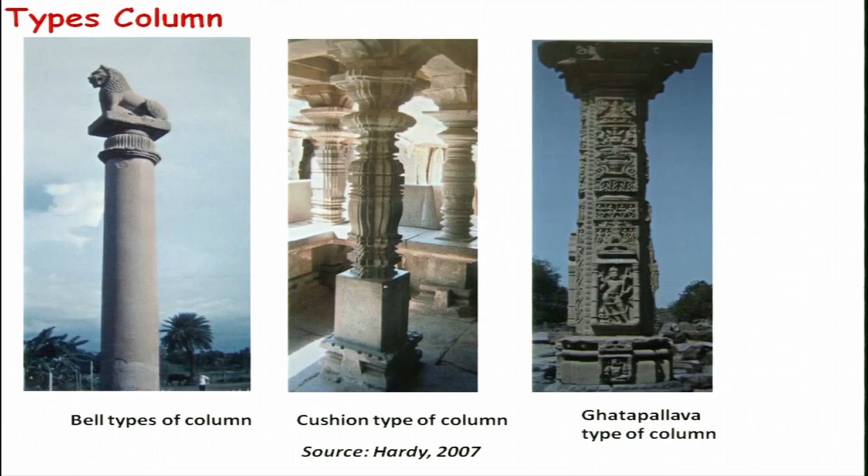So, there are various kinds of columns which were designed, but I will show you 3 of them. One is the bell type column, which I have shown here. Its load bearing capacity is quite low, whereas the cushion type has a medium level, and this portion has 5 parts. If you look, this is the first part, this is the second part, this is the shaft which is the third part, this is the fourth part, and this is your fifth part.

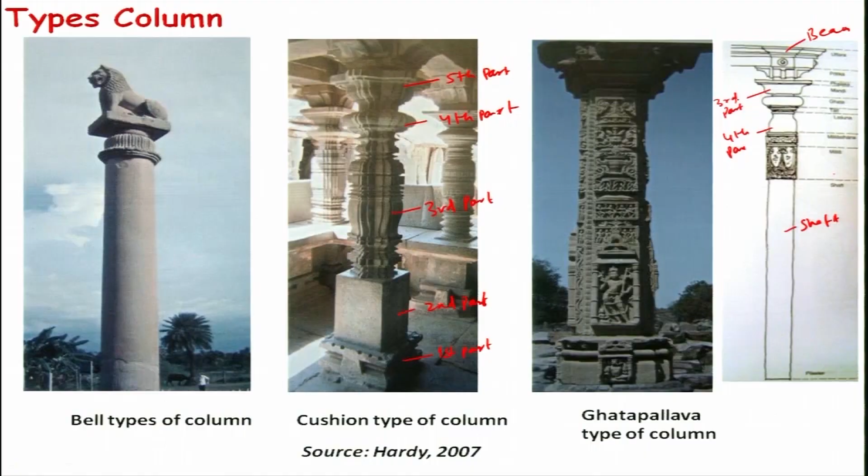Let me conclude with a few concluding remarks. A database of the architecture, technology and other aspects of ancient temples should be prepared well and also preserved, so that we can learn from it and also take care of them. Preservation of present structures through our indigenous technology, by proper training of people instead of hiring people from foreign countries, should be carried out, otherwise we will be in trouble.

And appropriate training should be given to engineers for maintaining these present structures which are being used by various people, and all aspects of engineering, technology, architecture and management related to temple building and its maintenance should be included in the curriculum, so that we will get enough technical personnel to maintain and repair our ancient temples. More research work on temple construction should be undertaken in a serious manner, such that we can preserve our temples and also use them in future.